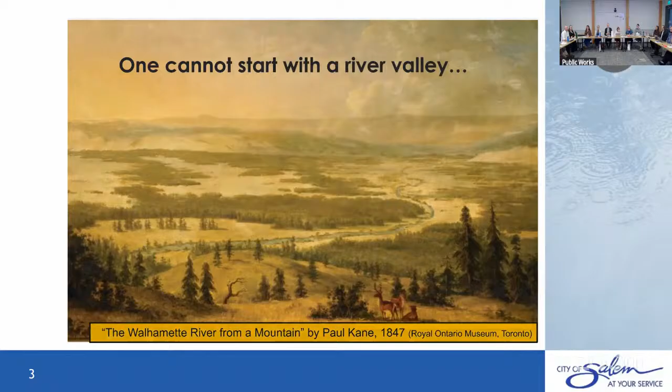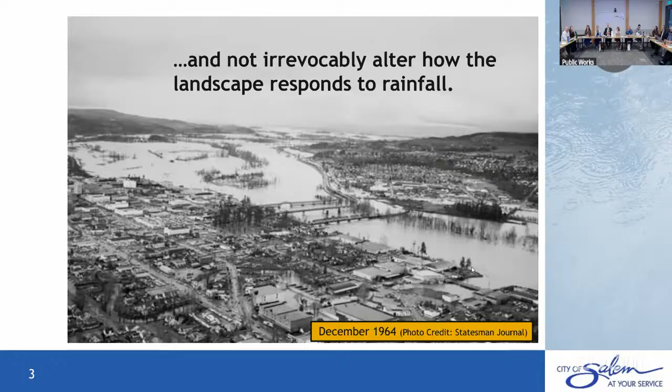Oh, this is just a nice little graphic like that. Yeah, wow. How many were around in '64? I was around in that. Around, but not here - trying to get from Corvallis to Central Oregon at that time.

Yes, so the stormwater system in the city is primarily focused on reducing flood risks to our citizens. For those of us that were around, I don't remember the 1964 flood. I came to Oregon right after the '96 flood. I was around during the response to the 2012 flood. So for those of you who have been here, know that when it does flood, it can create a lot of problems for us. One of the things we do with our stormwater system is really try to reduce that flood risk.

Now, we are very lucky in our system for a couple of reasons. We have Detroit Dam, we have Big Cliff Dam, and we have the entire system of 13 dams in the Willamette Valley system. I think a number the Corps of Engineers throws around is the annual savings on property damage each year from those flood reduction measures is about $2 to $3 billion. So that's not just property damage, but farmland damage, and damage that would occur along our streams and creeks and rivers. So we are very lucky that we have those dams to protect the valley from the flooding that we used to see.

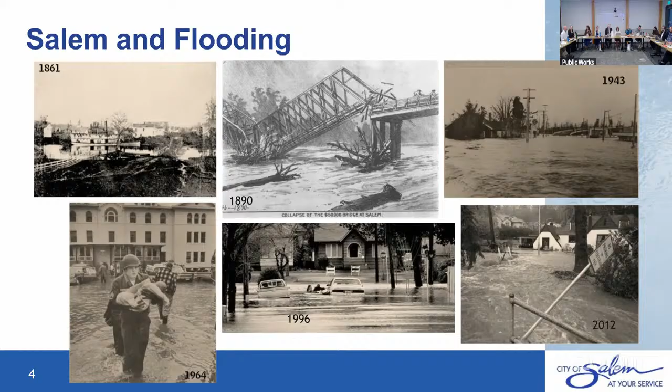Even with those measures in place, we do still have occasional flooding because there's a lot of things that still come in below those dams. And we still have to manage our system to reduce those flood risks.

An urban environment is really disruptive to the natural hydrologic process, right? So we have runoff from impervious surfaces. We have rainwater that's collected and put into our stormwater system. We generally have less shallow infiltration, as opposed to a natural system where you have something like 40% evaporation of the water that falls and 10% runoff. In an urban environment, you're talking about 30% evaporation and 55% runoff.

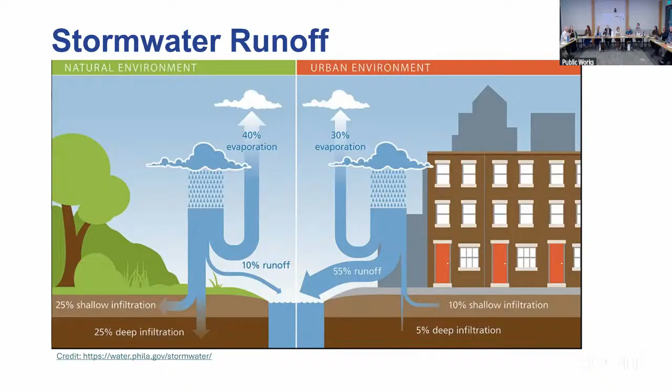So in natural environments, the rain that falls and the snow that melts is dealt with by soil infiltration and natural runoff processes. In urban environments, that water is concentrated, and that concentrated water goes into our streams and creeks, which can create the flooding problems that we talked about.

So in the Salem area, we manage 109 miles of streams within the city, 525 miles of stormwater, 7,000 stormwater manholes, weirs, backflow preventers, catch basins, and green stormwater infrastructure. You might recognize those as little created wetlands in parking lots and things like that. All of that really tries to replicate the natural environment, allow nature to do its thing, collect that stormwater runoff into these natural swales and basins, and allow that to infiltrate into the soil rather than send it through our pipes and into our creeks.

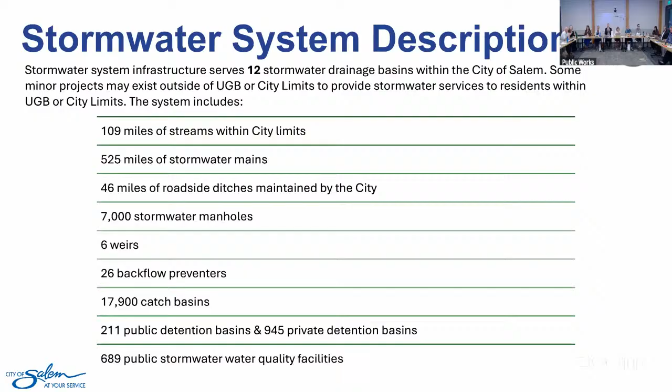And so that's one of the key things that we do to reduce the amount of flooding that we see in the city.

So I talked about our basins and the unique approach that we take to our stormwater master plan. We break our basins out into 12 individual watersheds. What we've done in the past is take 3 of those basins at a time and do what we call basin plans, where we go in and extensively look at what's needed in each of those basins. We do hydrological modeling, look at flood water retention, runoff, the types of culverts and bridges and things like that that might restrict the amount of water flowing down our creeks. Once we go through that entire process, we put it all together in the stormwater master plan.

And then on a 5-year cycle, we try to move through those basins again. So if you look on the screen, the green labels - Mill Creek, Pringle Creek, Battle Creek - those were completed. We are finishing up phase 2, which is West Bank, Glenn Gibson, and Upper Claggett. That will be coming out next year. We'll move into phase 3, which is Croisan, East Bank, and Little Pudding.

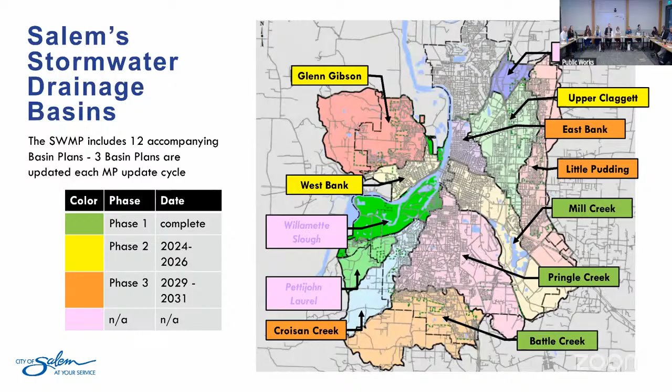You'll notice that some of them we're not really paying that much attention to, and it's not because we don't care about it, but some of these just have very little development opportunity. The Willamette Slough area, that's mainly Minto Island Park, so it's a natural system as it is. The Pettijohn and the Laurel Basin, same thing - there's not a lot of development opportunity, not a lot of man-made structures or built environment out there. And the same with the Lower Claggett.

So because of that, we don't necessarily model them to the same extent that we do the other basins, just because we don't have that built-out infrastructure, and we allow the natural processes to play out in those basins.

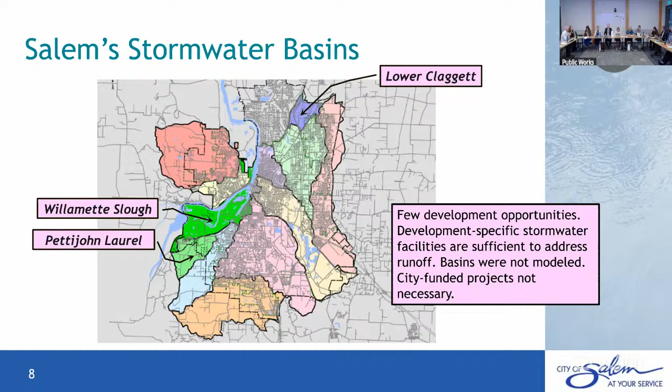So a recurring theme, if you remember from our water and wastewater talk, is aging infrastructure. Even in our stormwater system, we're faced with aging infrastructure, undersized culverts and things like that that need to be addressed. All new development creates additional runoff. Like I said, we require green stormwater infrastructure on new developments now, so we try to reduce the amount of runoff that's coming into our system. We're trying to balance our environmental needs, so a lot of the streams that we manage are fish bearing.

So we have to manage those natural areas for native fish. And then we have areas that have been developed in historically flood prone areas. Think about the areas around Mill Creek—it's a very flashy system.

These are some of our priority basins that we try to address so we can reduce flooding. One of the problems with stormwater is that it ends up going somewhere—if you reduce flood risks upstream, you're usually transferring it downstream. It's really a balancing act of how you manage that system to provide benefits to the entire community without putting one group of residents at more risk than the other.

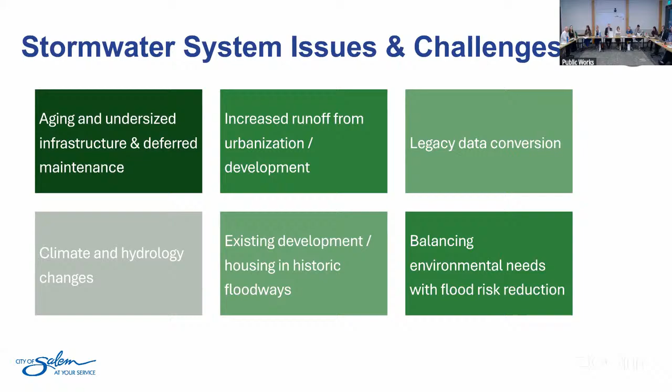And then the one we're starting to see is climate and hydrology changes. We are having more frequently intense storms, and we tend to get a lot of atmospheric rivers. They put a lot of pressure on our stormwater system and a lot of strain on our existing infrastructure. As we do our modeling for how we're going to build out our system in the future, we really have to pay attention to climate change. We talked about that a little on the wastewater side with inflow and infiltration—we're seeing more frequent storms that bring a lot of rainfall into our system in a very short period of time.

In the Stormwater Master Plan, we've identified 220 capital projects for the next 20 years to reduce flood risk in the community. That equals a total investment over 20 years of $470 million. A lot of these are increasing our capacity, addressing our aging infrastructure, and building out flood storage facilities. The old Battle Creek Golf Course is the prime example—when that golf course closed, we purchased a large chunk of it, and one of the benefits that area provides is a lot of off-channel flood storage during high wet weather events.

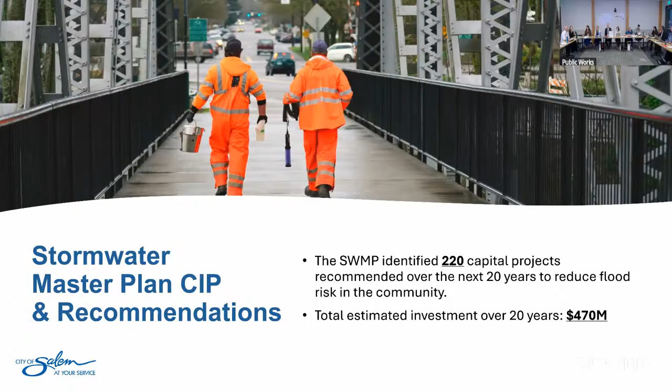Jason? Yes, I have a question—is the 470 million in today's dollars? That's in 2024 dollars, yes. Wow, so it's added another 15%. Well, at least. Thank you. I can't keep up with inflation.

So one of the things we do, and we've done this in all of our master plans, is look at what our short-term needs really are. Because when you just start throwing around numbers—400 million for stormwater, 250 million for wastewater, 600 million for water—there's no way I think you're going to get rates that will support that kind of funding effort. So we look at what our short-term needs are going to be, like we do in our other plans: we look at where the growth potential areas are going to be, what type of development we think is coming, and what are the key projects that give us the most benefit for the dollars we have invested.

$173 million is what we projected the need is over the next 5 years. Currently, the CIP has budgeted $17.8 million in the 5-year CIP total for stormwater. So again, this is one of the ongoing issues—our needs are really great, and our ability to fund them is not keeping up.

Yes, sir, does the state help you? The state seems to want you to build more housing all over the place, but do they help you with the cost of all the infrastructure that has to be built in when you build all those homes?

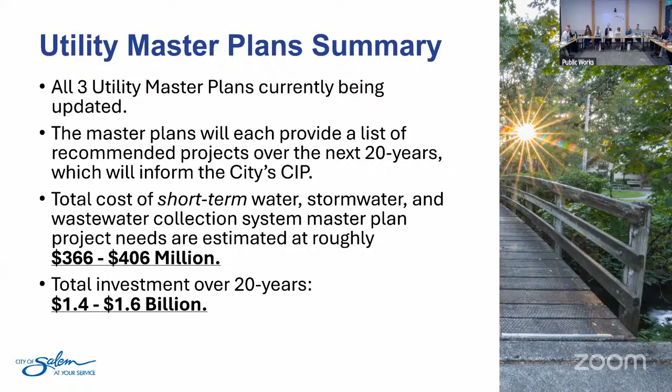And we're going to turn it over to Alan here very shortly to talk about the CIP. In context, you're going to see how much we're allocating to the CIP now—it's significantly lower than what it would take to get to those numbers. So, Alan. Oh, I got the controls right, got here.

It right here, man. So thanks everyone, Alan Dannon again, I'm the city engineer, here to talk about the capital improvement plan because all of these projects go through the engineering division in one form or another. Today I'm just going to focus on the utility CIP because that's what we're here to talk about. I did want to highlight that this is just a portion of the overall city CIP for the next 5 years, which just went into effect on July 1. It's about $171.6 million in total project costs—that's with an M, not a B. And that represents a little over 40% of the total city CIP, which is around $410 million.

For 1 year? For 5 years, 5 years. We have 57 projects in the CIP this year. I was told I was not allowed to do a slide on each and every one of them, so come to my stand-up show to get more data.

The CIP does include only newly programmed funding, so these numbers and project numbers don't include past budgets that have already been approved. Projects that are backlogged or already being worked on with existing funding aren't in these totals, so the actual number of what we're working on is a little higher.

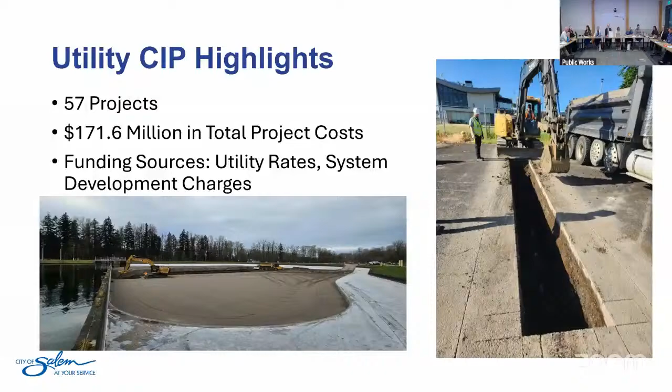The bulk of the funding here is from utility rates, but the numbers do include some system development charges for developer reimbursable projects, or some projects with growth components that make them eligible. Of the total here, about 4 million is SDCs, so the rest is utility rates.

Is the capital already sitting there, or how much of this 171 is funded ongoing? Yeah, so it's ongoing, and this table shows each year the transfer that comes in from utility rates to capital year by year. It's anywhere from 31 to 38 million, and that 38 million number includes most of the SDCs, because we don't program out developer reimbursements for 5 years since we just don't know what those are going to be from year to year.

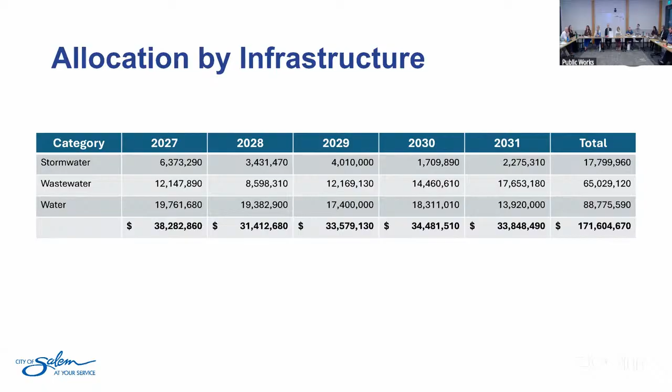Other things in that regulatory category include temperature mitigation and tree planting. Although that's not a permit requirement, it kind of falls in that environmental category.

The bulk of what we're spending is on fixing our system, rehabilitation and replacement. I'm probably going to lapse and say R&R, so that's what I mean when I say that later. It's not resting - yeah, no, it's the opposite.

An example of that - often what we do is pair that R&R work up with other projects. We're lucky enough to have the safety and livability bond going on right now with a lot of roadway projects. So with those, we make sure that if there are areas with deteriorating utility infrastructure, we try to fix those with utility rate funds along with the bond project, so we don't build new pavement and then have to cut it up later to replace a culvert or something. The McGilchrist culvert replacements in this program are a good example, with several replacements along that project alignment.

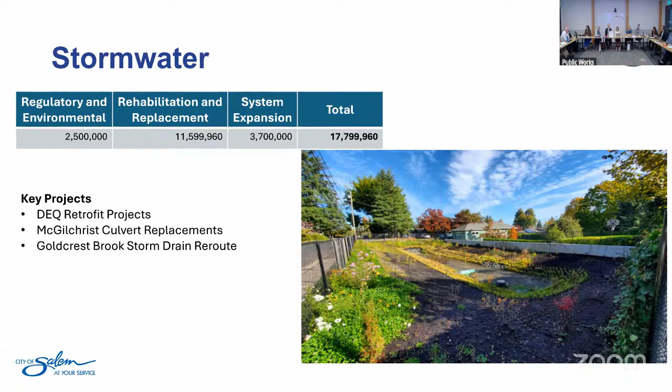And that doesn't touch everything. One of the big ones is secondary clarifiers, which—without going into great detail on wastewater treatment—essentially separate solids from liquid so we can run through the treatment process and discharge to the river. There are 4 of them out there. When the plant is running at full capacity, all 4 are needed or we'll violate the terms of our permit, and they're all getting down to their last legs. So we have a program starting to rehab one every summer while the weather is dry and the plant isn't running at full capacity. That project will be executed just in time, because those clarifiers are very old.

Is the funding for that just coming out of the wastewater utility rates? Yeah, that's right.

Next category is sanitary sewer overflows. Similar issue—when we have heavy rain events, it's too much for our system because our system is very leaky. You often see the notification in the newspaper after a heavy storm that there was a sanitary sewer overflow, or SSO, at certain locations. So one of the things we try to do is correct areas where we have restrictions in the system or pipes that have fallen into disrepair, causing these overflows. One example in the CIP we're working on right now is Manzanita Way, which is actually in Keizer, but under our IGA with Keizer, we operate and do capital maintenance on their wastewater system.

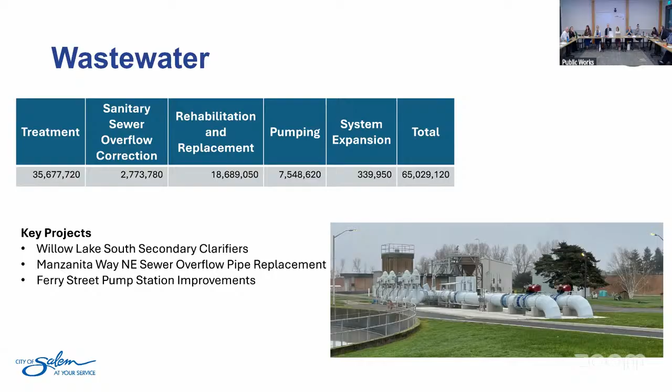Last category is water. There's been a lot of talk about this category lately, and we've done a lot of work at our Geren Island treatment plant, but there's still things that need to be done out there. One of the opening pictures in this part of the presentation showed the filters being resanded. For those who don't know, we have sand filters out there, and periodically our operators scrape off the top layer that collects material from the river water. Over time, that 3 feet of sand gets scraped down, and when it reaches 18 inches, it's time to add new sand. That's about $1.5 million or more per filter, included here in the capital program on an annual basis. We try to do one filter a year.

There's also work at Geren Island around our source, our intake, to make sure that's protected and will always function despite how the river changes over time. So we've got a big project coming up to stabilize our intake area. What's the minimum flow for your intake? The minimum flow that we can handle, our maximum daily, is 700 CFS.

Next category is transmission, and you all might have talked about this when reviewing master plans on water. The $1 million here is for a feasibility study to look at how to move forward with the concepts in the master plan for upgrading our transmission pipes that go from Geren Island down to Turner, where Franzen Reservoir is. That's actually a picture of Franzen Reservoir when it was drained, on the right there.

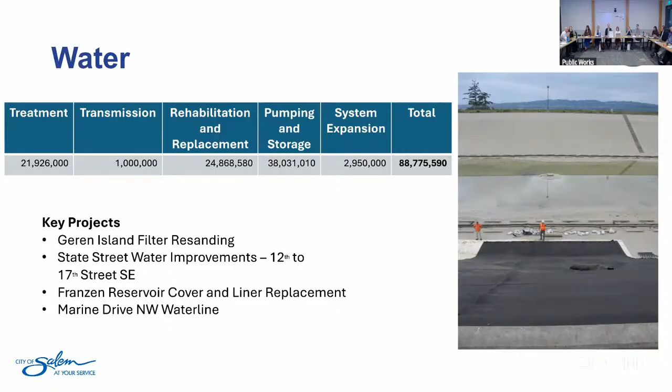So that's a quick run through of the current CIP, what's coming. And you all, I think, talked about a lot of these issues probably with the master plan. Water supply resiliency - protecting our intake, those transmission lines that I mentioned. We've done work on alternate sources like groundwater related to the drawdown, continued work on that, and then maximizing the use of our aquifer storage and recovery facility at Woodmansee Park. All of those will take lots of effort in the coming years.

We talked about Willow Lake. Willow Lake's permit to discharge treated wastewater to the Willamette is coming up for renewal. It's actually been expired since like 2009 or something like that. But they're telling us we're going to get it here in the next year or two, so we'll get a draft permit for that. And when that happens, there's going to be a lot - not just the maintenance work that I talked about at Willow Lake - but a lot of work that needs to be done to bring our discharge up to the standards in that new permit.

So that'll be substantial. Seismic resiliency in our system - we've got some projects, Fairmont Reservoir is one that's coming in the current CIP, but there's many more. We're doing as much R&R as we can of our system, but as Jason pointed out with stormwater, and I'm sure with the other two as well, we're just taking small bites of the big demand. Then related to stormwater, flood risk reduction and dealing with some of those creek erosion issues - I think those are things we're thinking about for stormwater going forward.

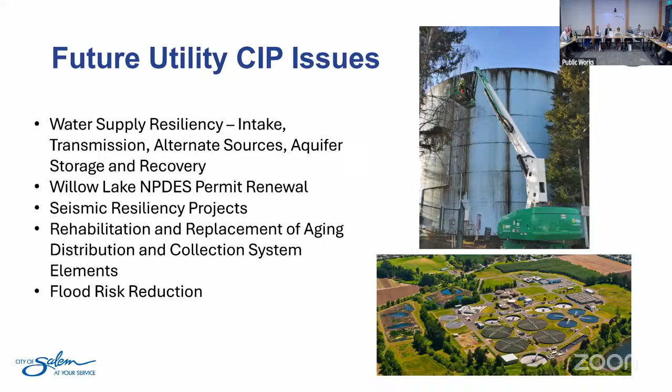Yeah, if there's any questions on it, that would be a good time to answer them. I will share, there's a lot there and we're not trying to just overwhelm everybody with all these things, because we know that we can never get to all of them. We're a city just like any other cities in this country that have aging infrastructure. But we do have to be strategic and make sure we're putting our money in the right places as we go forward. Thank you.

So some questions, Ken. To what extent - the CIP is basically a budget for expenditure - to what extent are the system charges that we're to set affecting that?

That's good. So I think, just to restate the question, make sure I understand it. To what extent do the utility rate changes affect the capital transfer? Maybe Merla or Toby would be good ones to answer this, but with what we have now, we're able to keep that sort of $30+ million range. I don't know if you guys want to expand on that.

That is what we currently have in the plan, yes. However, all these updates to all these master plans, and then we have costs that kind of came through late last year as well. So we definitely need to be strategic about our planning. But currently, yes, we have about $30 to $33 million every year.

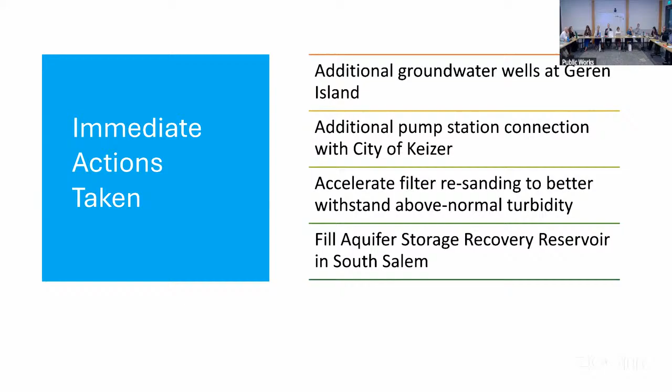So those are the things we did, considering we're probably going to have to close our gate at Geren Island and rely on other sources. What that did for us was, I broke down to show what we can produce at Geren Island with the river if we were able to use it, because that's basically our baseline. If we can't use it, this is how we came up with these projects, so that we know we can at least get by this winter and for a few winters.

We had existing wells already at Geren Island that produced about 6.8 million gallons a day. With the 3 wells that we put in, and we developed another one that had been drilled previously—actually 2 other ones that had been drilled previously—we were able to get about 2.1 million gallons. There are under-drains around all the sand filters out there that also collect groundwater.

Depending on the time of year and how we're using the system, there's a range where we can get about 4.8 to 5.4 million gallons of water. The aquifer storage and recovery system, depending on the needs and the zone of the system, will be somewhere between 3 and 7.2 million gallons a day.

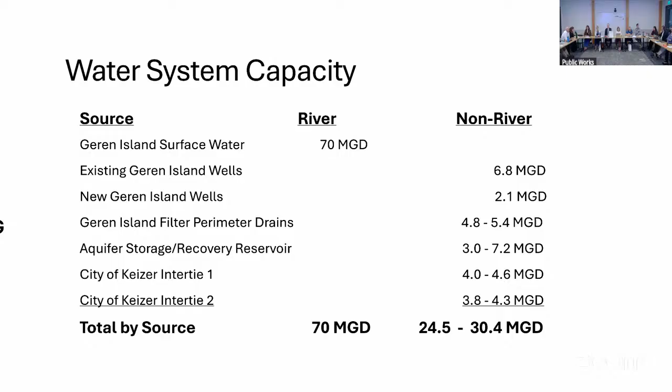We filed a motion for preliminary injunction last week. The county had filed one, I think, a couple weeks before that. So things are in motion. I guess we'll see what happens with it, but we do have a plan for what that next step would be, and it's really further getting better use out of the ASR system.

The challenge is this is going to go on every year they do this — it's going to go on every year if they do it, not just one year. That's right, the turbidity issues will be up front, but after that, flow will be the issue. Yeah, we'll have to see.

One thing Alan talked about is what we're doing to protect our intake. There's a big project we're calling a flow maintenance project, but really it's a huge dredging project to dredge out that river so we can ensure the water in the river gets to where our intake is located. We had to do a semi-emergency one this last year because that December storm also left a lot of sediment and debris in a place in the channel where the water was not going to make it to where we take the water.

We worked with the water control district, and the rules they have to follow are a little less than ours — theirs is irrigation, we're a municipal water supply. They were able to get permits, and we ended up dredging and moving around about 3,000 yards of material. Otherwise, we'd have had trouble meeting our water demand this summer, but that work succeeded, and if we had to, we could get 70 million gallons of water a day out there.

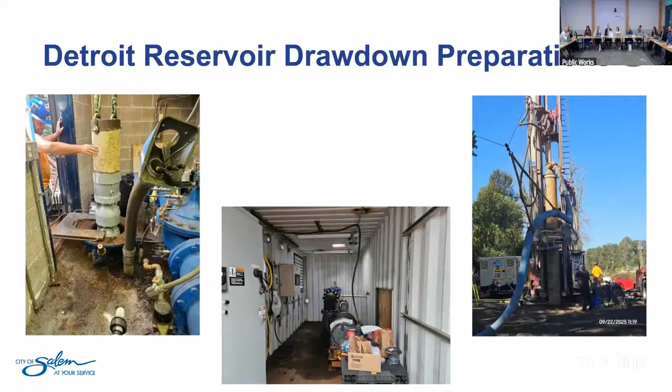I know we're running out of time, so I want to hit leachate and biosolids here real quick. Anyway, the Detroit stuff is definitely affecting our operations. The other thing that has affected our operations is — I think everyone's heard enough about PFAS on the news now to know that they're polyfluoroalkyl substances that don't go away. People call them forever chemicals. One place where they end up is our wastewater, and our wastewater is regulated by the DEQ, so we have that permit that Dale spoke about earlier. You asked if they're going to have PFAS requirements in it when the new permit comes out — I don't know that we're hearing that yet.

However, there are other PFAS requirements affecting us and making us look deeper into how we operate our systems. In drinking water, there are already 6 compounds with thresholds we have to meet. Fortunately, we have not detected any in our drinking water—we've got a good drinking water source. But the DEQ is now moving into non-drinking water, pointing out these 6 compounds as hazardous waste, and they're looking at making rules on how they'll regulate that going forward.

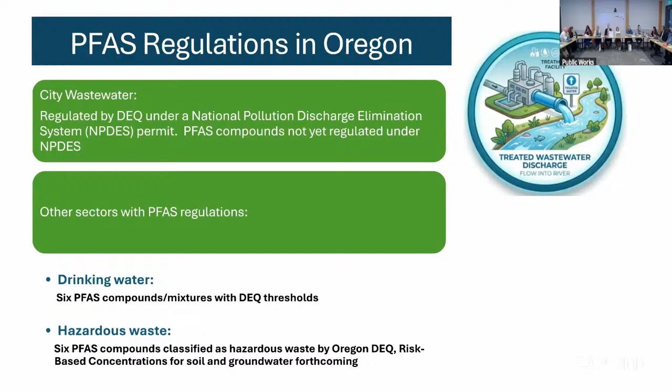Unfortunately, this PFAS ends up in normal wastewater. So anyone flushing their toilet, using their sink, doing whatever they're doing—just the things we do every day—have PFAS in it. So there's a level of PFAS that enters that wastewater stream.

We also accept leachate from 3 different landfills, although primarily now it's only coming from one, Coffin Butte. Leachate is, for lack of a better term, basically garbage juice. When it rains, that rain percolates through the soils into the landfill and has to go somewhere. At the bottom of the landfill there are under-drains that collect it, and then they have to do something with it.

As a large wastewater treatment plant, we've had permits allowing them to bring their leachate into our system. I think we're into year 5 now—it may have been a little longer—but we're approaching 2027, the last year. That leachate, because it percolates through all that trash and everything that goes into a landfill, actually has pretty high concentrations of PFAS in it, and that's something we have to deal with.

This next slide shows the difference between what all of us enter into our systems, shown in the table to the left. It shows just 3 of the main elements: PFOA, PFOS, and PFBS. Without leachate, those are the values we're seeing. When we add leachate into our system, that middle graph is what we see. So not much change on the PFOS, some change on the PFOA, but much more on the PFBS.

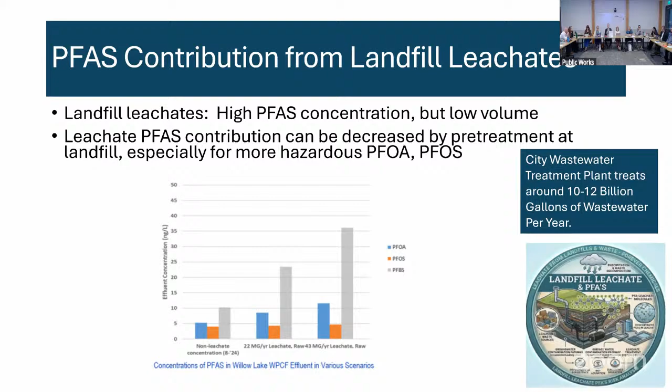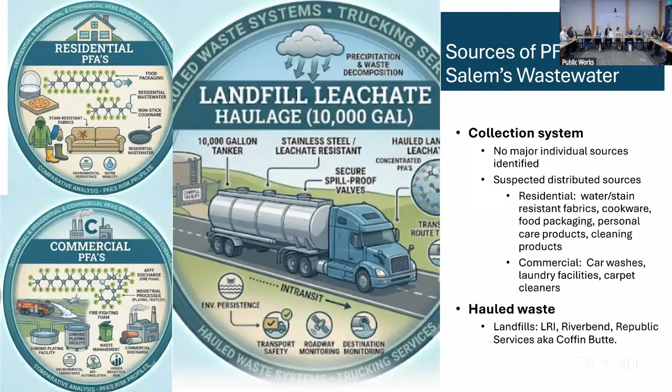So what happens at Willow Lake? I just talked about how some of it gets decomposed into short chains, but ultimately we have it in our effluent. That table before was showing our effluent without leachate, with leachate, and the third one showing if we accepted more leachate, it would increase in volume.

We've done a lot of testing since 2023. In the Willamette River itself, we detect upstream of our discharge point about 0.98 parts per trillion. Downstream of our discharge, it increases to about 3.17 parts per trillion. So we are definitely adding it to the system. However, the drinking water threshold is 4 parts per trillion, so what's happening with us isn't affecting the water to where you couldn't drink it, but there still is an impact, which is why we have to figure out if we're going to keep accepting it and what type of pre-treatment we would require.

That doesn't really change the way we process wastewater, so there's really not a cost to it.

It's just, this is the outcome of it, because there's really nothing that we can do to get rid of it at this point in time. But it does affect our biosolids.

So we've tested our biosolids, and these are the numbers. PFOA was about 1.2 parts per billion - notice now we're talking parts per billion in solids versus drinking water. PFOS is about 12. Oregon doesn't have any regulations regarding it, but states across the country are adopting regulations.